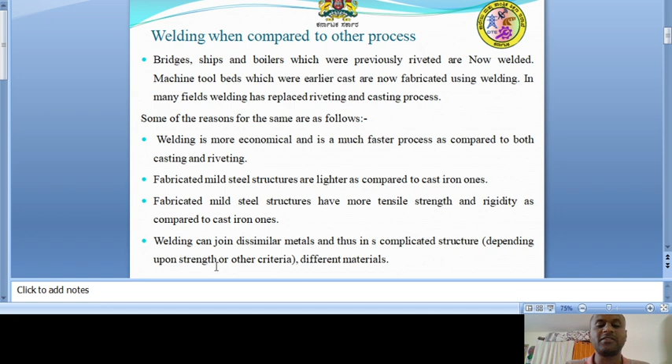Next, fabricated mild steel structures are lighter compared to cast iron ones, and have more tensile strength and rigidity. Welding can join even dissimilar metals. If this is material A and this is material B, the same metals can be joined and dissimilar metals can also be joined, even if both are not the same. Welding can join similar metals, and depending upon the strength and other criteria in a complicated structure, different metals can also be joined.

Going to the next slide. For the same complexity of the component, the design of the welded structure is simpler compared to that of a cast part. Whether it is a butt joint, lap or edge joint, any joint, the design is very simple compared to casting. Standard rolled sections help in fabricating different structures by welding.

Welding is almost noiseless compared to riveting. In riveting, the rivet is put into the hole and continuously hammered at one end, so the sound is more; welding is much quieter. Welding finds extensive use when making modifications, additions or extensions in hospital buildings. Nowadays in the fabrication of buildings they are using welding.

The cost of pattern making and storing is eliminated. In casting processes, cope and drag boxes were used to make the pattern, and storing it is eliminated. Compared to casting and riveting, fewer persons are involved in welding fabrication. Only limited persons are used, so manpower is reduced.

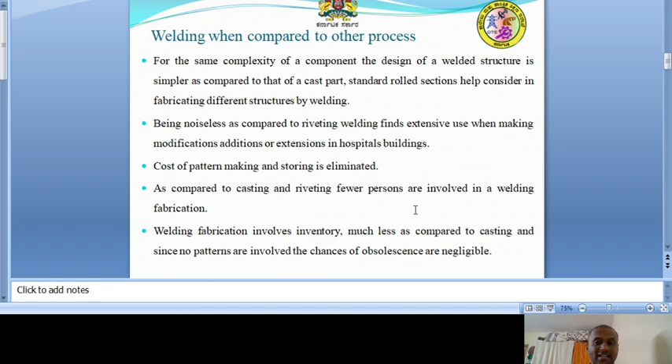Going to the next slide. Against riveted constructions, welding fabrication involves less cost of handling. Structural shapes not easily obtainable with riveting or casting can be produced very easily with welding. If you want to join this part and this part, it is very easy with the support of jigs and fixtures. Compared to riveting, this process plays a very wide role in fabrication processes.

Here welding design involves lower cost and is very flexible also. The cost of the machine is very less. It works with the help of current, right? So it is very economical. Fabrication by welding saves machining cost involved in the cast parts. It is very saving in nature.

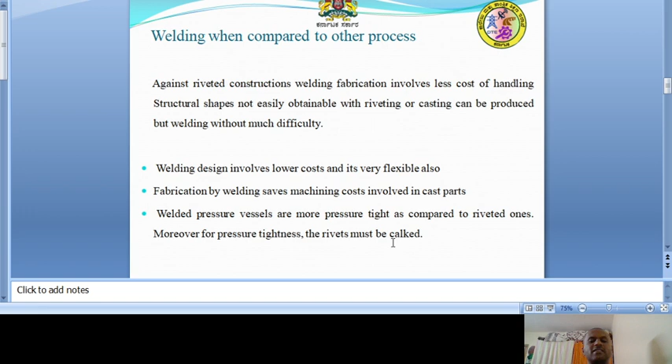Welded pressure vessels are more pressure tight as compared to riveted ones. The pressure vessels or the cylinders where it has been manufactured, it is very tight as compared to riveted joints. It is stronger. Moreover, for pressure tightness, the rivets must be caulked. Okay, going to the next slide.

The advantages of welding are, as no hole is required for welding, hence no reduction of area. So structural members are more effective in taking the load. There is no hole required. So wherever the welding is required, there we are welding, and a sound joint is obtained.

In welding, filler plates, gusset plates, connecting angles, etc. are not used, which leads to reduction of overall weight of structure. Since these are all not used, the weight of the material will be very less. Welded joints are more economical as less labor and less material is required. The labor is very less, only 2 or 3 persons can do the job, and the material required is very less, so there is no wastage.

The efficiency of welded joint is more than that of the riveted joints. If you differentiate riveted joint and welded, the efficiency of welding joint is more. The welded joints look better than the bulky riveted and butted joints. If you see the plate of the riveting joints, it will be like this. But when you see the welding, this will be the welding. So it is not bulky.

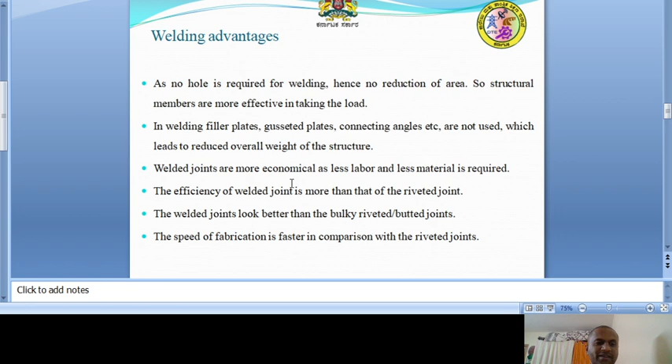The speed of fabrication is faster. Fabrication is faster in comparison with the riveted joints; the speed is very fast in welding. So advantages are, complete rigid joints can be provided with welding process. Full rigid, tight. So no shaking. Complete rigid, very strong joints are obtained in welding process.

The alteration and addition to the existing structure is easy. If you want to make any alteration or any addition, it can be easily made to the structure by welding, and no noise is produced during welding processes. In the case of riveting, the sound is more, hitting with the help of hammers, right? But no noise is produced during the welding process as compared to riveting.

The welding process requires less workspace in comparison to riveting. The space required in welding is less. After welding, the material is sent to the other side, so the space utilized is very less. Any joint or any space can be made very easily.

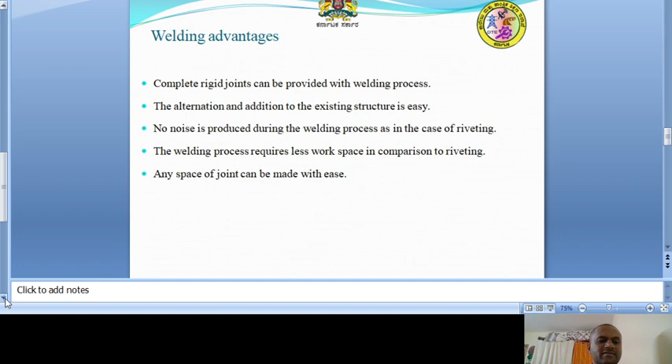Going further, the disadvantages of welding are: welding joints are more brittle and therefore their fatigue strength is less than the members joined. Due to uneven heating and cooling of members during welding, the members may distort, resulting in additional stresses. While welding, it should be continuously welded. If it is not, heating is uneven and the fusing time may change. If heating and cooling is not uniformly done, the materials may distort, resulting in internal stresses in the material.

So we require skilled labor, and good electricity is required for welding. Skilled labor is one of the disadvantages. If the labor is skilled, the weld obtained is very good. If it is not done properly, the joint may get cracked. No provision for expansion and contraction is kept in welded connection, and therefore there is a possibility of cracks.

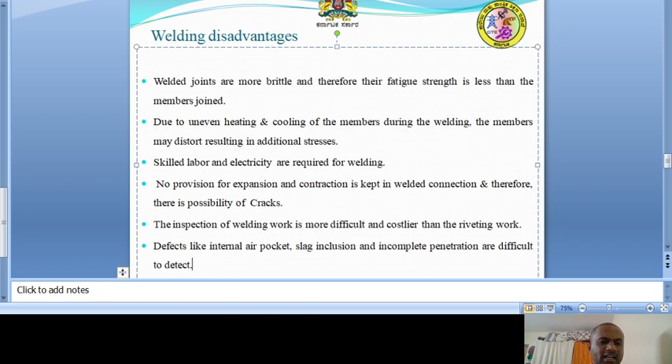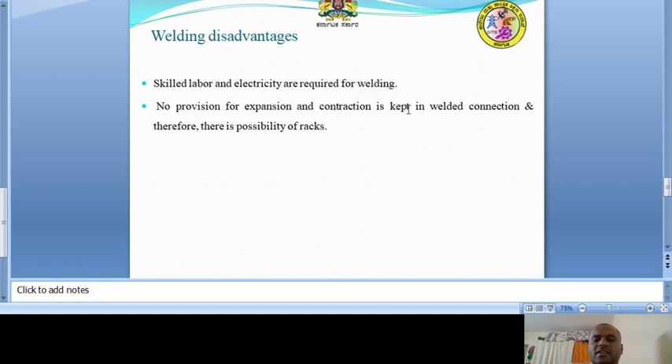Skilled labor is required as earlier said, and electricity is also a concern. No provision for expansion and contraction is kept in welded connection, so there is more possibility of cracks. If the cracks are more in the welded joint, it breaks into two halves, so there is no safety. Whenever you produce parts like ships or aircraft by welding, any crack leads to accidents, and the loss is more to the industries as well as environment. So we should do very good work in welding.